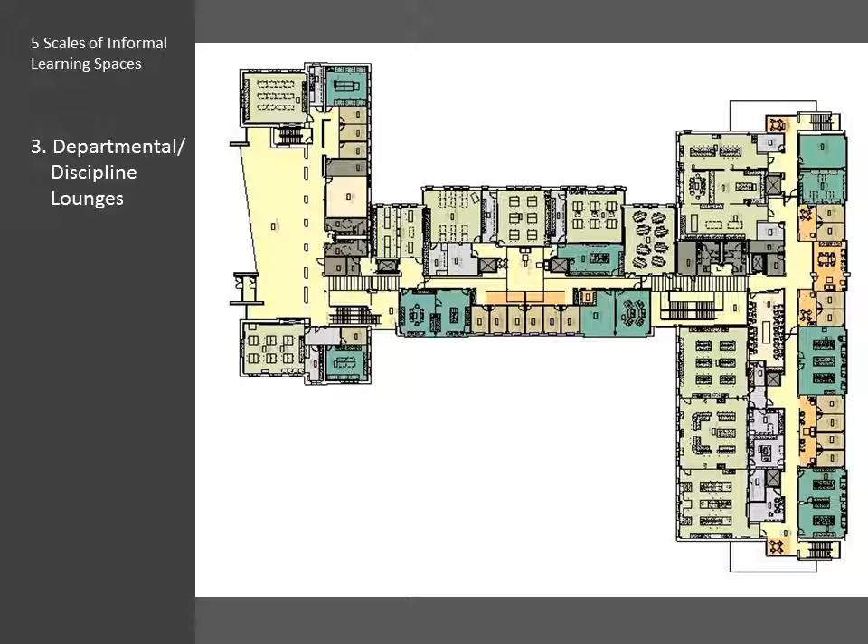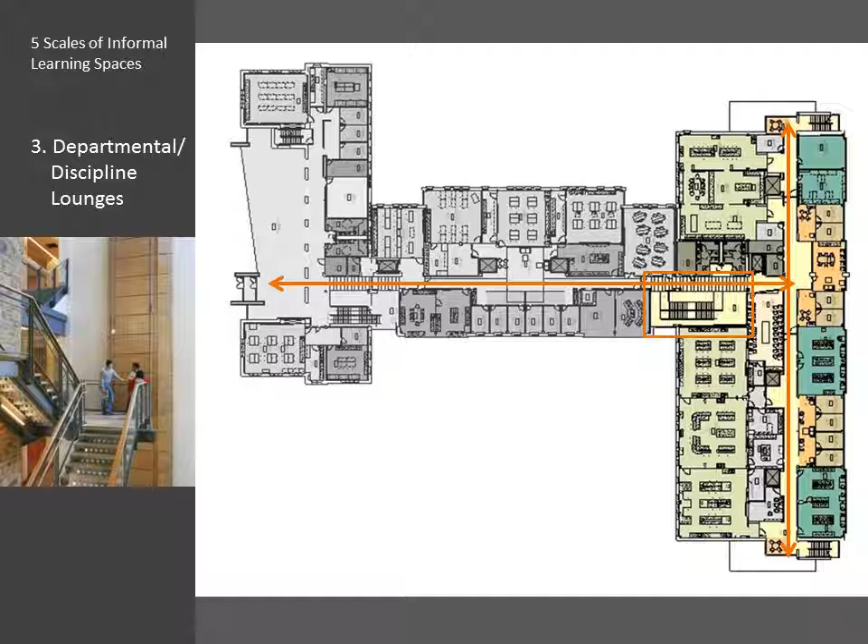A third type is called departmental or discipline lounges. These are spaces dedicated for larger groups of students, somewhere between 10 to 30, who get together for academic clubs. At Hamilton College, it was a big concern to make sure to have those spaces so that individual disciplines or departments wouldn't lose their identity for their majors. We created those types of spaces at junctures in circulation and highly visible locations.

In more contemporary times, we've found a renewed interest in creating lounges, not necessarily to promote department or discipline-specific places in a certain location, but to create shared opportunities for different academic clubs to use those spaces in different ways. So we're creating slightly more flexible, less department or discipline-specific space.

What's interesting is we see almost an inverse bell curve. In the early days, a decade ago, everyone was really worried about discipline identity. Then, about 5 or 6 years ago, people weren't as concerned. Now they're actually concerned about making sure they do have that kind of multi-purpose space for their students. It's an interesting change over a decade, but on average now about 9% of informal spaces.

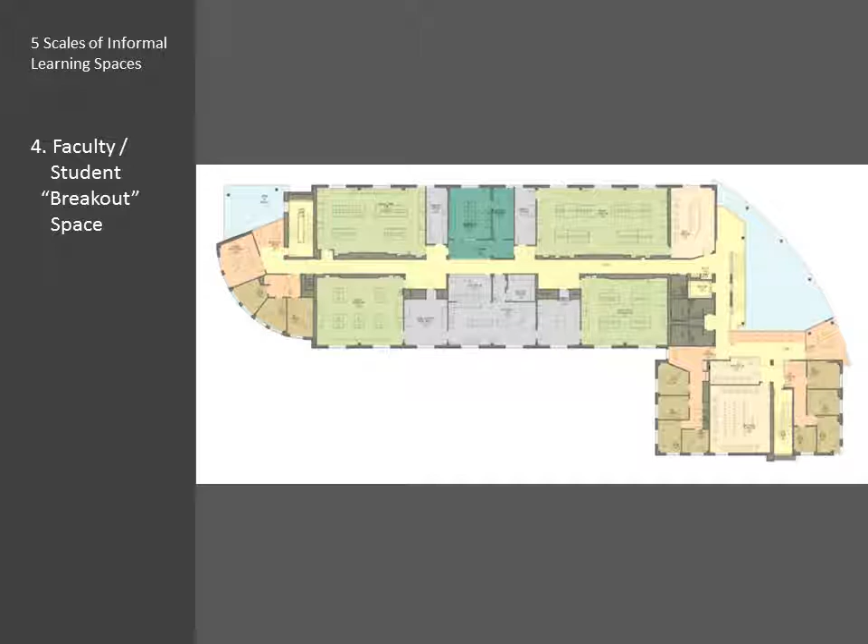The next scale we like to call faculty-student interaction space. As the economics of building mean that faculty offices have to be smaller than they may be in some older buildings, we found that creating areas for faculty and students to get together — we call it breakout space — frequently in the vicinity of offices, really provides an excellent opportunity for impromptu discussion and for groups of students or faculty to get around a table or do a chalk talk, where you couldn't accommodate that many in an office.

Not surprisingly, the interest in this type of space has definitely skyrocketed over a decade, and on average over a decade's worth of work, we've seen that average about 19% of the informal areas.

Over time, everyone's been talking about how to really increase collaboration. Well, one way you can do it is by having groups of faculty and the students mentored by faculty get together in space.

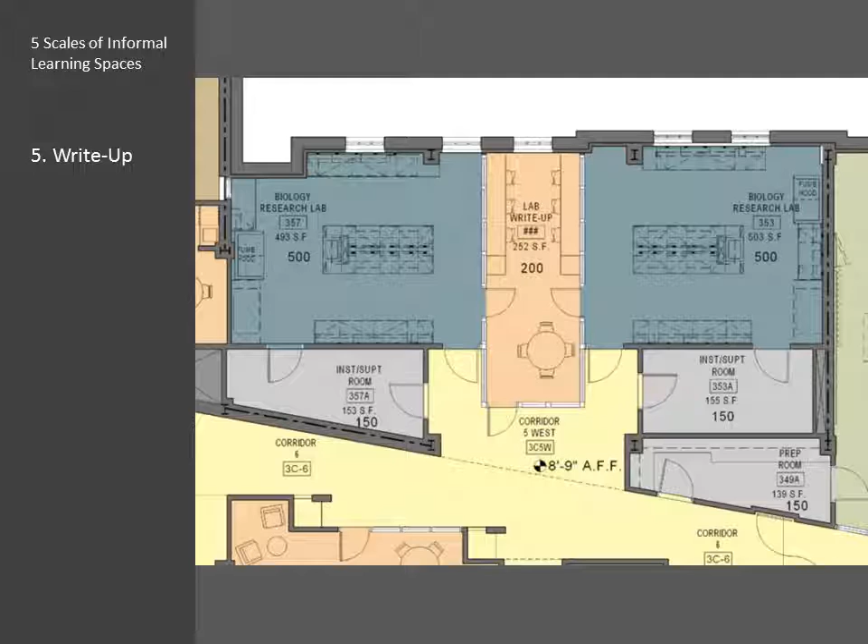About 6 years ago, when we were planning the Barshinger Life Sciences and Philosophy building at F&M, we began to experiment with combining these write-up areas in the middle between two faculty investigatory laboratories. That model was very popular for quite a while. It really isolated write-up and breakout space from the wet research areas. Here's an example of that pattern we used at New York University.

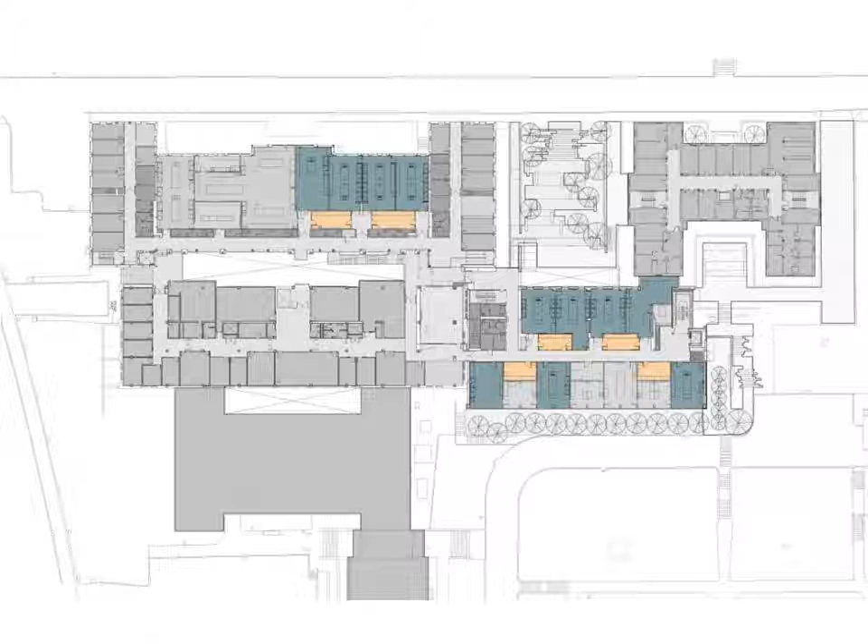In more recent times, however, there's been a real move to promote collaborative use of space among faculty. So at the College of the Holy Cross, in this plan, the research laboratories are in blue and write-up is in orange. By co-linking these lab spaces together, it increases flexibility. And by clustering the orange spaces so they are shared between laboratories, it really helps create a culture among the students that enhances collaboration.

Overall, to reflect on what we've learned: the proportion of write-up space for these buildings has exploded because people began to largely abandon the idea of an isolated cell for faculty research space and instead are interested in collaborative research. We see a marked change almost overnight that started about 6 years ago. Overall, we found the interest and percentage of this is about 18% of the informal areas of the building.

So if we look at the cumulative analysis, the white bars represent the net areas that were programmed for all of these projects. Here you see in orange the amount of space in those buildings used for informal learning. Over that decade, the average was about 8,500 net square feet, which in relative percentages averaged almost 11%.

In fact, what we have found is that in projects on the boards now, that percentage has moved to the 12 to 15% range.

There's one other really important point, and this is my last one: the rise of transparency as an important part of the design for collaboration. The projects we showed you from earlier in the decade, Swarthmore and Hamilton, had key areas where the faculty were interested in using more glass to promote visibility of the science and connection.

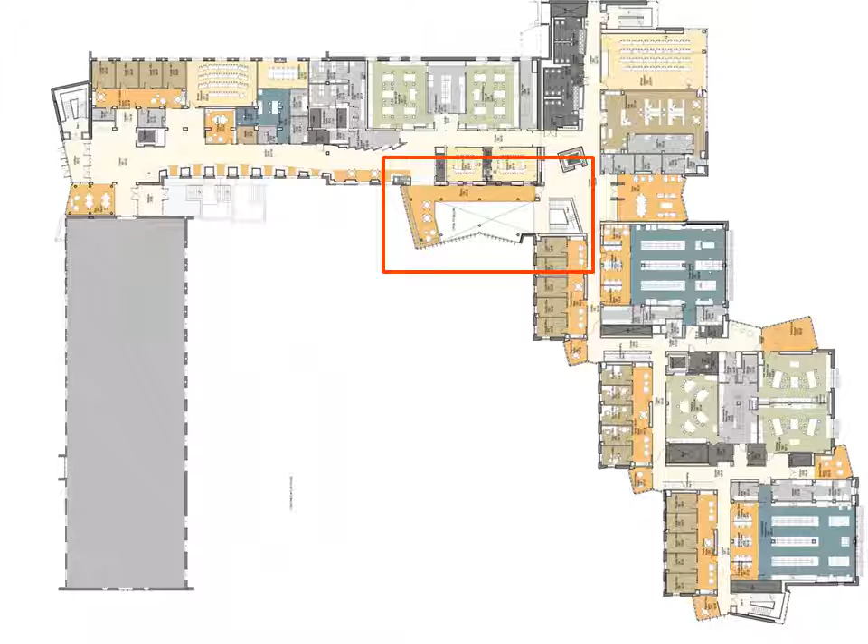Then, as I said, the rest of the building has these other three blocks and the elbow. So the first scale of space that Kip mentioned are the commons, and we have several large spaces. One is that walkway, and another is this large atrium that's again glass filled. It's visible through 3 stories, because this is the first floor, a second floor, and then the third floor looks out at it.

And adjacent to this is a coffee shop, sandwich shop. So this space is always populated by people talking, groups of students working, and also by people eating and drinking coffee. Part of our message in this is that this building belongs to everyone on our campus. Every student is required to take at least 2 natural history, science, math courses. And so this building is used by every single student on that campus, and we wanted every student to feel ownership of that building, and the faculty as well. In fact, we now have our faculty dining room in our science building.

The next level is student spaces, and we really stuck our neck out on this. Every single corner, so every vertical column of each of those main blocks of our building and the back corners, every single level has a student study space.

They look like this. They're enclosed by glass with a door so that they're separated from noise going on, and yet students can see who's in there, they can see their friends. There's wireless throughout the building, obviously.

There's floor-to-ceiling blackboards, but they're also free to use the glass, and they do. Walking through the building on any given day, you might see the Krebs cycle, you might see a diagram of phylogenies of animals, you might see mathematical equations, and they really are writing all over these spaces.

These spaces were occupied from the day the building opened. It was as if they were just waiting to run in. Last semester was our first final exam period in which we completely occupied the building, and it was amazing. It was the best final exam period I've ever experienced.

The whole building was abuzz with students learning, and they were working together in groups, they were teaching each other, they wanted more space. Every single corner of these spaces that we provided have been occupied continuously by our students.

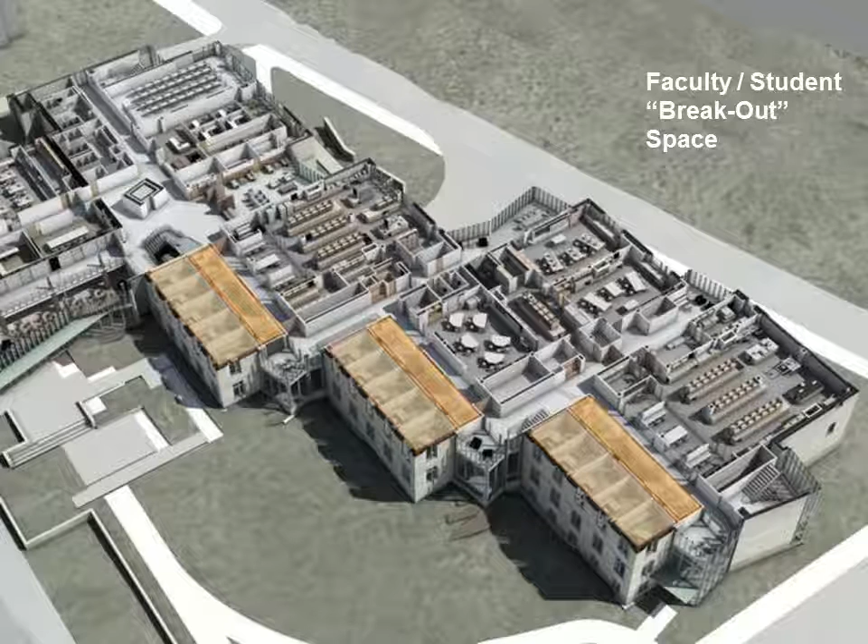This was especially important to us because as we began planning our building, we kept emphasizing that we wanted to be as accessible to our students as we possibly could. We didn't want to be back in some faculty ghetto at the end of a long, dark hallway. So what these spaces do for the faculty is make us visible, and we can leave our doors open.

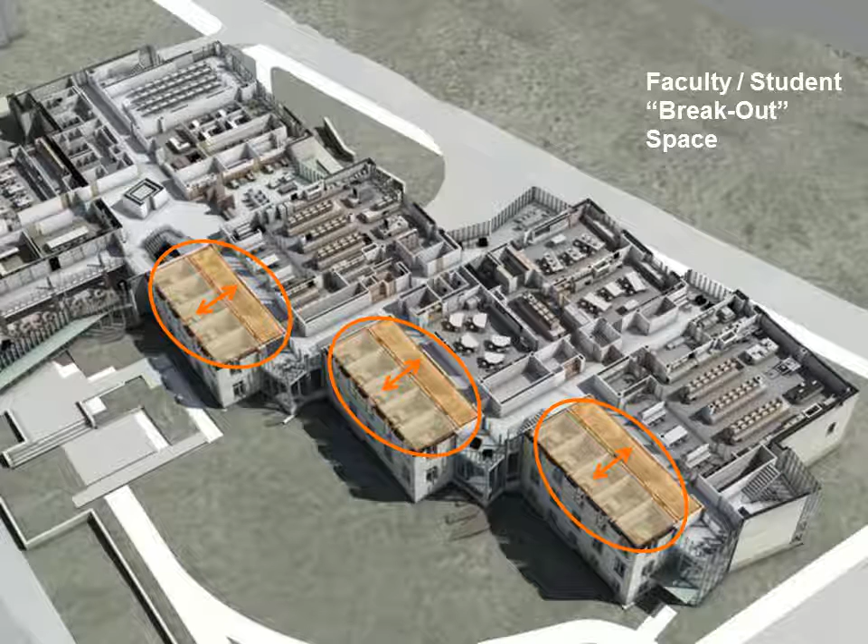So here's one of these spaces. These are faculty offices, a group of 5 of them. But then there's this space that students walking by—this is the main hallway outside the building—can see that we're in, they can see that our office is open, but we don't have the noise from the hallway.

We can leave these doors open if we want to, so students can come in here. It also lets us be able to open our windows in our offices if we wanted to, because we have HVAC separation in these spaces.

These spaces—this is an early photo—now have tables and chairs where we can meet with several students at a time. Faculty also use these spaces to give makeup exams.

Sometimes groups of students are working there together. Students can wait for faculty. We put journals out, we can put specimens out, we can put things that we think students might be interested in, and it catches their eye and brings them into our offices, which was what we really, really wanted.

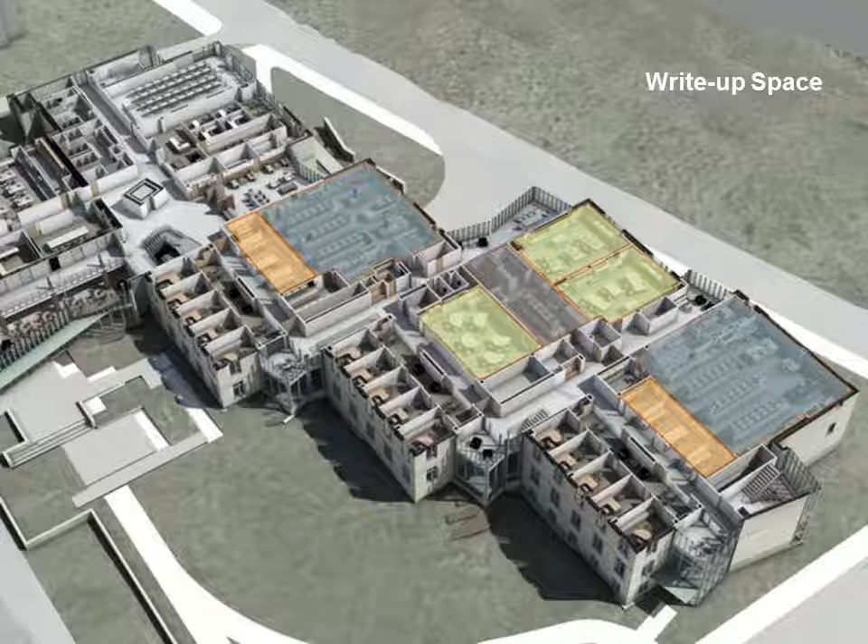Finally, we have write-up spaces. One of our goals in our building was to help our students understand the collaborative nature of science. So we made an intentional decision not to have individual research labs, and instead to have clustered labs, so that we would be more like a modern research institution, giving our students the sense of that current model of collaborative interdisciplinary research.

Each of these spaces contains the laboratory space for 5 faculty, and then outside of each of those spaces is a student write-up space, specifically for the students who are involved in working in research in that lab. So this is what one of those spaces looks like.

Again, the students have completely populated these areas. They have card swipe access so they can get into them anytime they want to, and some of them live there. We've put in some of them little lounges where they have microwaves, sofas, and little kitchenettes.

There's lots of table space, lots of power, lots of internet connections if they want it. Faculty use these spaces as lab meeting spaces, and students use them to work on projects in the lab. They can also work on homework if they're doing research and need to keep running back and forth. We wanted to capture the culture of science as an active, interdisciplinary, and collaborative kind of activity. So those spaces have been used wonderfully.